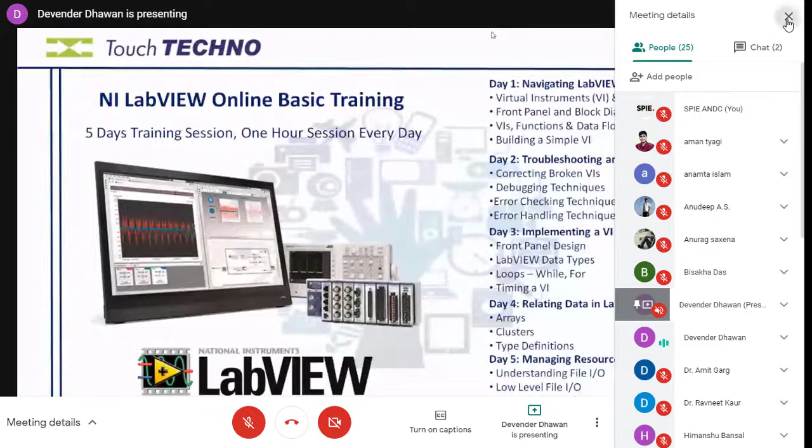On day one, we'll just look at what LabVIEW is and how basically we can design a program in it, what all things are there, how to navigate in LabVIEW, what all functions, and how to design the front panel - all these things will be covered today. From tomorrow onwards, some debugging techniques and other things are there.

Just a little about me - I'm a technical manager with this company and a co-founder. I have some experience in application engineering, and I have CLAD certification also, which is for LabVIEW basic level only.

We'll keep this presentation just for our reference purpose to keep us in line, but we will majorly work on the software. So you can start your LabVIEW software, and then we'll directly work on it. I'm using 2016, and I'm hoping most of you are using the 2020 version only, so whatever I'm doing here would work there - there won't be any version mismatch.

Okay, so once you open up LabVIEW from your start window, this is what you would see. This particular window is called the Getting Started window for LabVIEW, and this is where you can launch multiple programs and projects.

So we'll first launch our program. There are two ways to do that. One is to go under File here, and you see this New VI option - what is VI, we'll discuss later. So either I can click on this, or I can just press Control N. Okay, so you see these two windows are coming up.

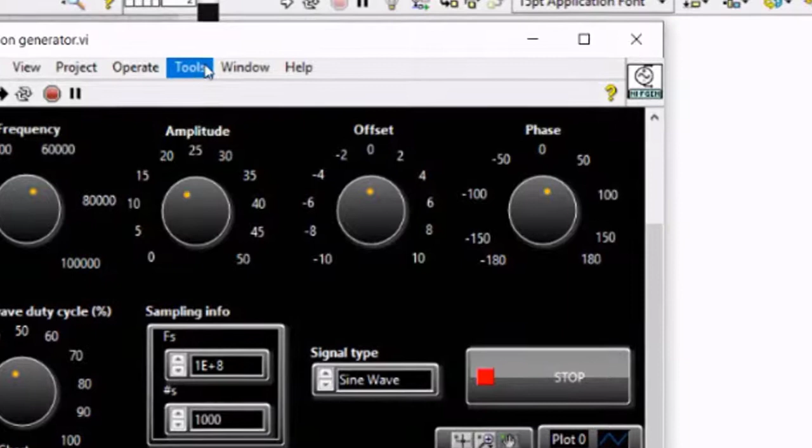Yes, you are right. Like if you see this program again, as a user I am only interested in input and output. So this knob is an input device, and this screen here is basically an output device. So as a user I am only interested in input and output devices - basically this is my user panel. Okay, and if you see a real function generator also, what we see as a user is some knobs, some LCDs, some trigger pins and all. But as science people, we know what is inside it - there's a PCB, there's a circuit running inside it. So for this particular program, we have the same thing here also.

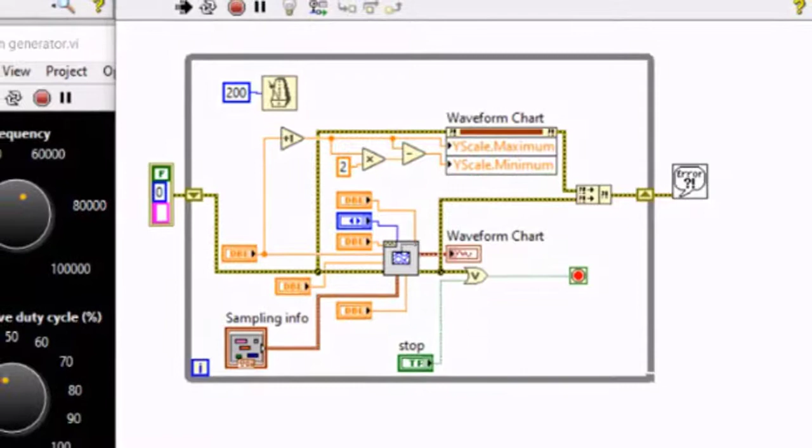So that is why they have separated it into two things. One is the user interface, another is basically the algorithm interface, you could call it. User interface is called the front panel - you can see it written as front panel. And your algorithm interface is called block diagram, written over here also. One difference you can see is the white window and the checked window - the white window is your block diagram where you will design your blocks, and the checked window is your front panel or user panel where you will put your input and output devices.

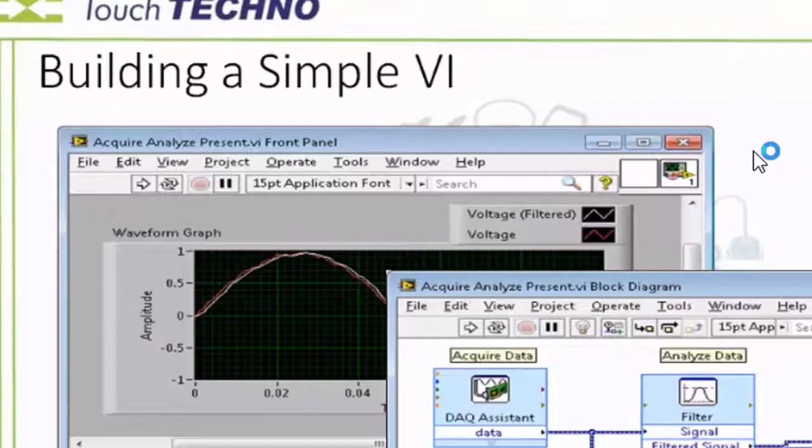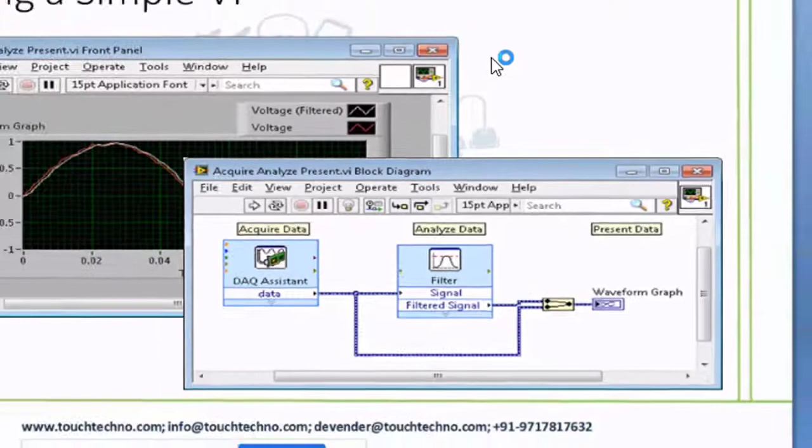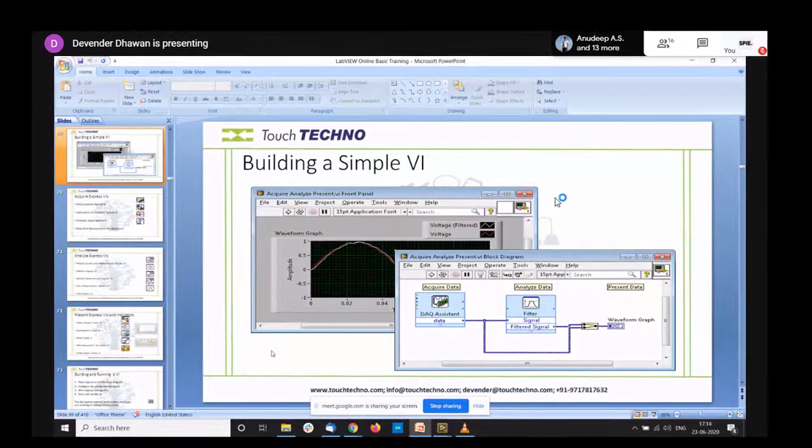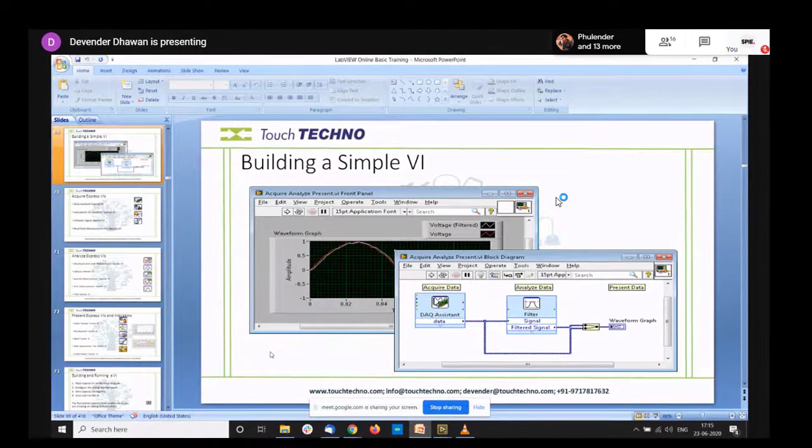So were you able to understand what they did? Yes, sir. Okay, so if you have any questions, just let me know, because we are at the end of our session today. So if there's no question, we can stop for today. Okay, thank you, Deven. Thank you, sir.